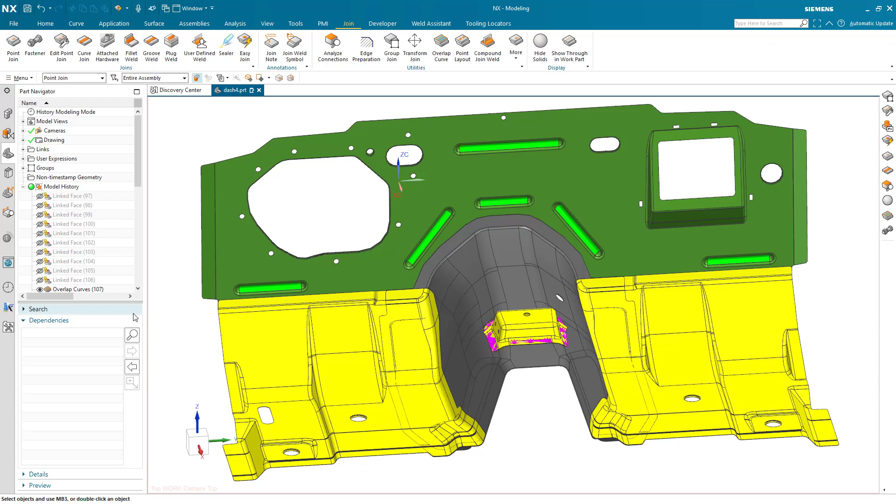I run the preview. You can see it figures out where those areas are going to be. I can choose the type that I want, and if I just click OK, you can see as a result I'm going to get spot welds placed in all those locations. These are all going to accept default values since I didn't go through the dialog. I simply said go generate spot welds wherever the algorithm came up with them.

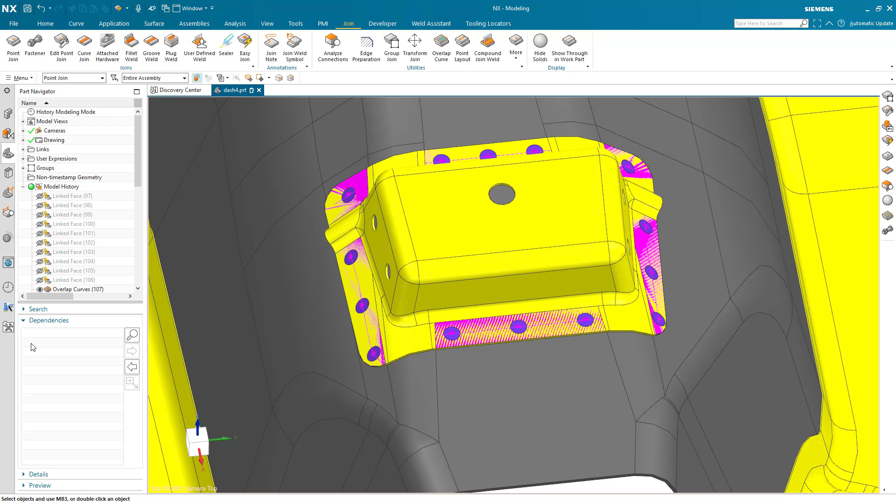And so that's a really quick way of getting these placed in the appropriate locations for this particular set of components. So let's look at a more complex example. We'll go back into Easy Join. And this time, we're going to select the remaining components in our assembly. So we'll take these 4. And we'll go ahead and run the same preview.

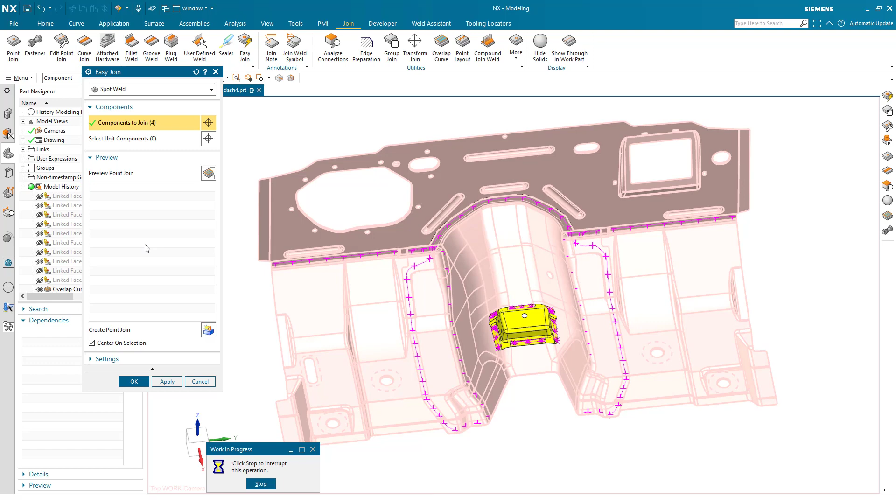You can see it's generating those overlap areas, guide curves, spacing out the points along those curves. And then we divide things into areas where we have 2-part stack-ups and then areas where we have 3 sheets in the stack. So if we're interested in taking a look, for example, at these 3-part areas, if I have this option for center on selection and I select one, you can see that those will be highlighted.

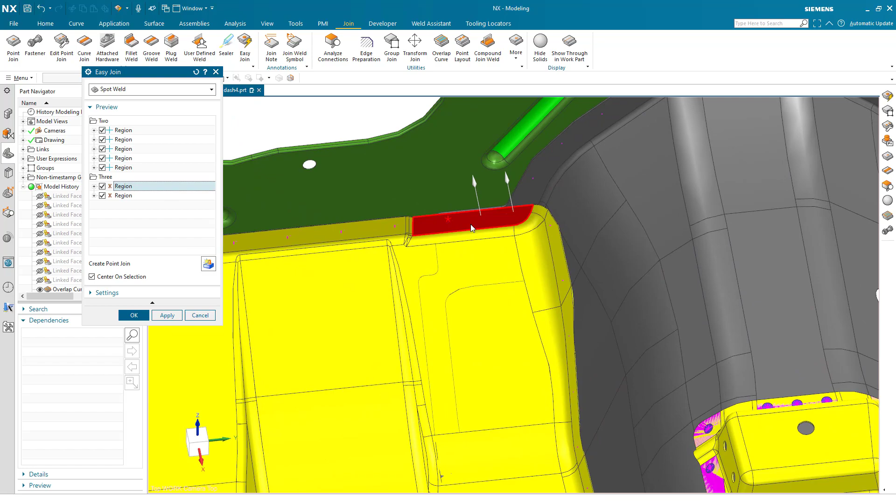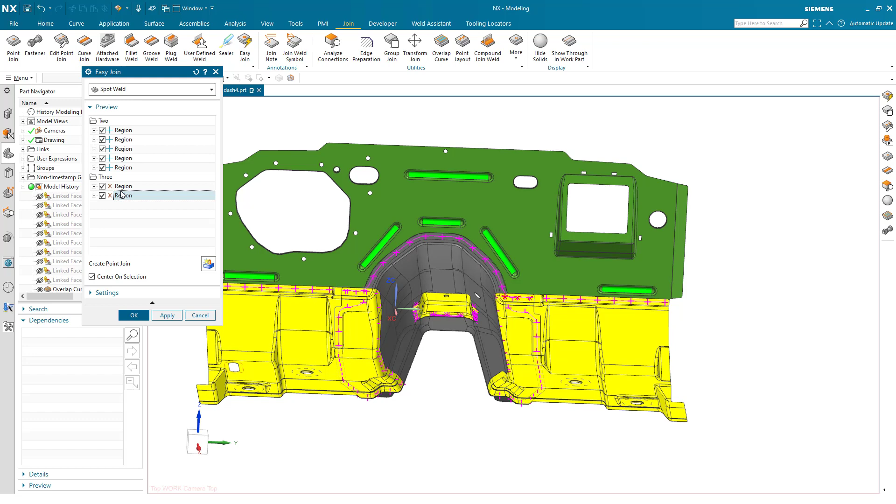You can see here that we've got an area where it looks like the gray part comes in between the green and the yellow ones. And then we've got another similar region on the other side, same thing. In this particular area, we've got a 3-part stack. Everywhere else it's 2. Now for this particular assembly, the way I'd like to assemble it is in the 3-part areas, we want to go ahead and use spot welds.

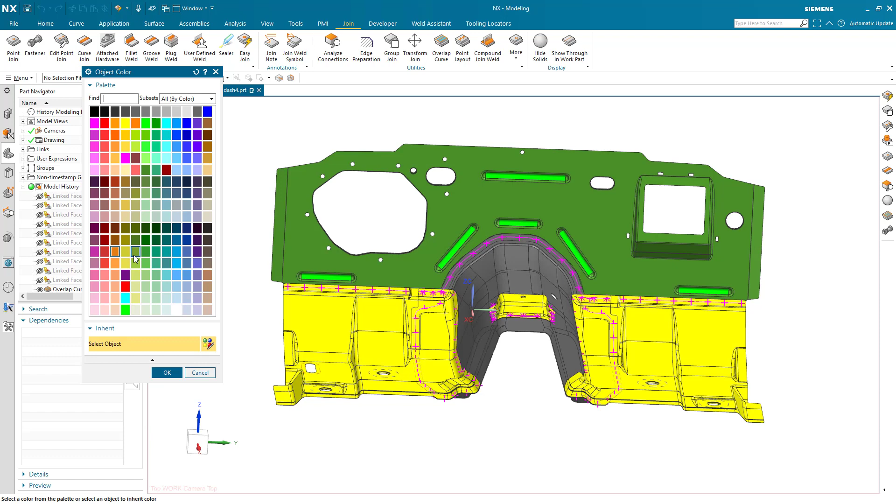So I'll go ahead and go into a dialog, and rather than just clicking OK, this brings me in here where I can decide, okay, what do I want my spot welds to look like? So instead of just accepting default values, I can choose how I want them represented. So maybe I'll choose cylinders, or I can choose spheres. I can choose an appropriate size. And then finally, I can decide what color I want those to show up as. So we'll go ahead and create spot welds at those areas.

Now, everywhere else where I have the 2-part joins, we want to create mechanical clinches. So here, once again, I'll go in. Instead of spot weld, we're going to choose mechanical clinch for our type. You'll notice that the preview will be updated for that type. And the default behavior is whenever we have mechanical clinch, we want to see a green cylinder.

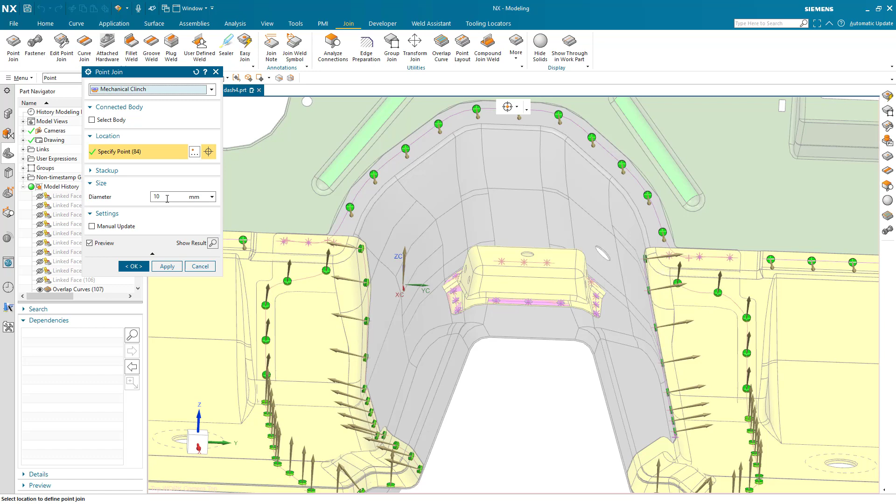This is controlled by another settings file that determines for the clinch what it should be represented as. But because these are all in the 2-part areas, it's always going to be a green cylinder. When we have 3-part areas, that would be represented as a triangular prism. I can choose the diameter that I want to see there. We'll make these 8 millimeters. OK.

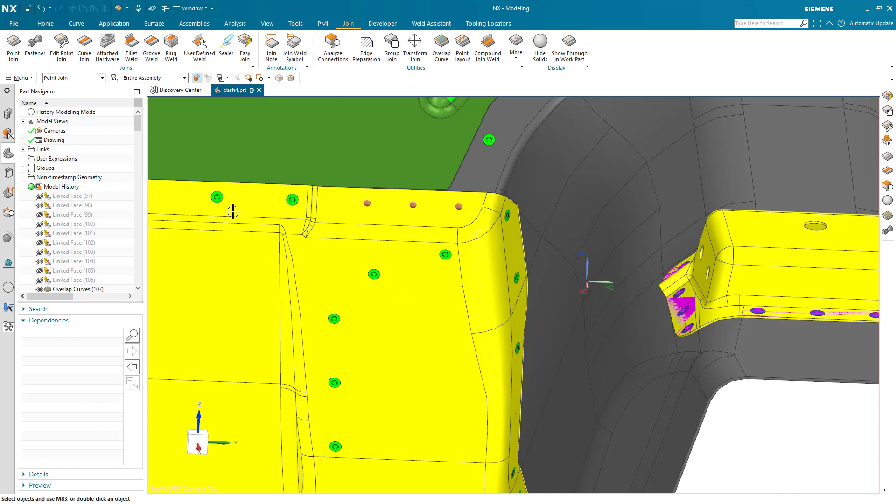And you can see that as a result, I was very rapidly able to create a large set of these join features. You can see we've got some spot welds here represented with the spheres. We've got other spot welds here represented with purple cylinders. And then finally, we've got our clinches, which are quite obvious with the green cylinders throughout the model.

Now, if we were to look at any particular area and want to make some changes, so for example, if I wanted to take this whole set of clinches along this area and move them maybe to a different location. So maybe instead of using a center line, I want to switch over to an edge offset. I can select one of those, and we can traverse and see that, okay, this mechanical clinch was built from a point layout, which then was generated off of an overlap curve.

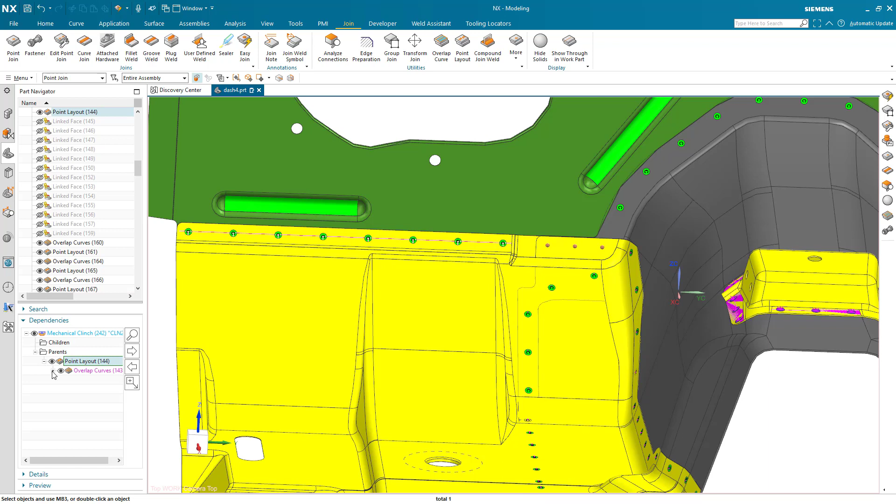So let's go ahead and modify that overlap curve feature. And what I'm going to do is I'm going to switch to an edge offset. So here I'll go ahead and say, all right, well, I want to use this edge here. I determine what the value is that I want. So we're going to make that 8 millimeters.

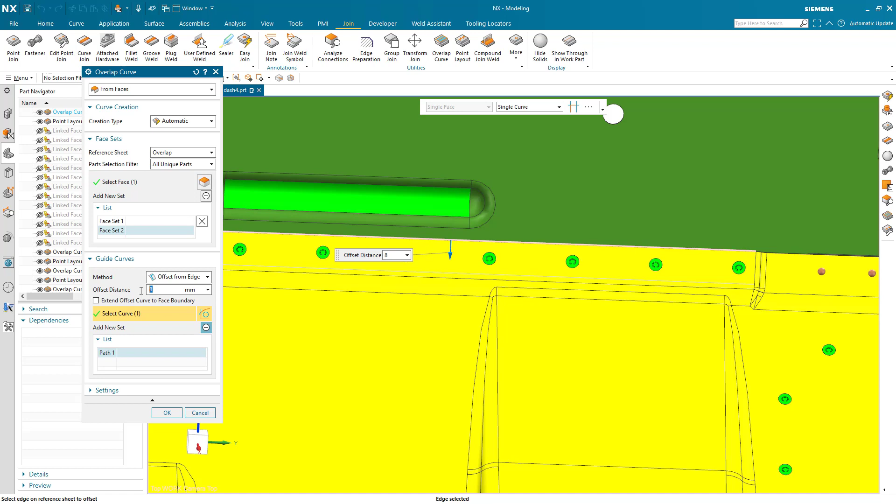And you can see that when we do that now, because we have all of that geometry, it was very easy for me to take that entire set and move them a little bit closer to the edge because I didn't want to use the standard center line. So really the power of this is that we'll lay out the initial set of points, create the join features at those locations, but then it's very easy to go and start to tailor those to represent what you want in your design.